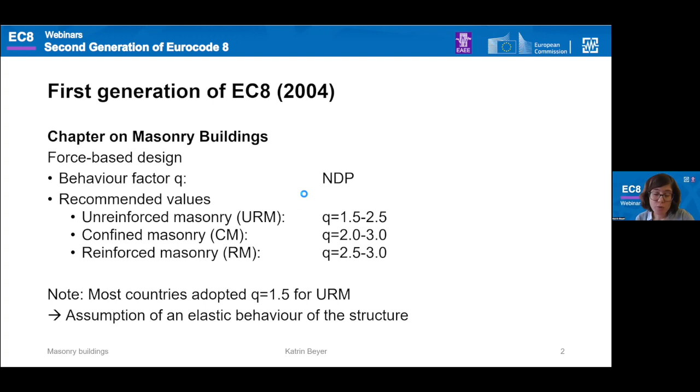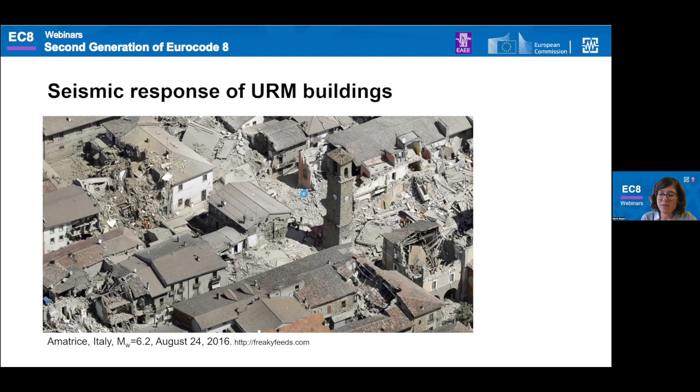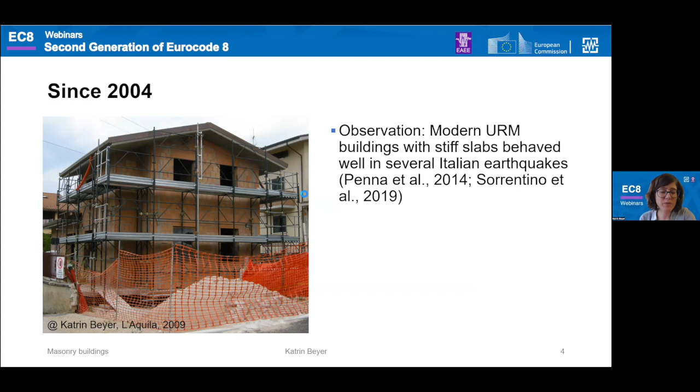And most probably that choice was fostered by the pictures that we see after every earthquake, where most of the damage is concentrated in unreinforced masonry buildings, like the one here from Amatrice. However, if we look a little closer at the damage, we see that these very heavily damaged buildings are often historical masonry buildings, and the modern masonry buildings behaved rather well in many of the past earthquakes, in particular in many of the past Italian earthquakes, with several reconnaissance reports in that regard. So what is the big difference between these modern masonry buildings and these historical masonry buildings?

One key feature is the absence of the box behavior that we have typically in historical buildings. You see here a historical building which had been retrofitted at the top with a reinforced concrete slab or roof and a ring beam. So there we have that box behavior, but at the first floor level we clearly don't have it, and you see the structure falling apart. I find this picture illustrates very well what box behavior is.

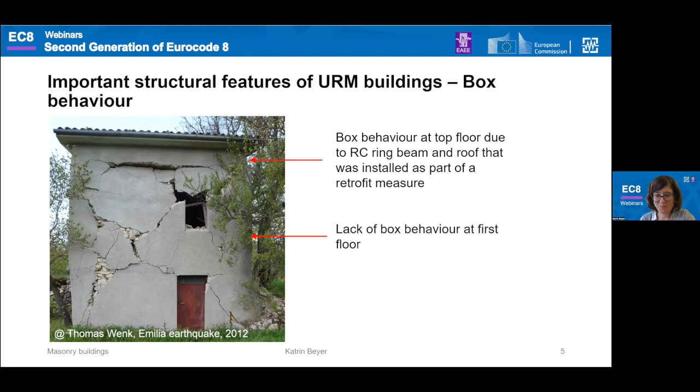The second important feature is the stiff floors and very good wall-slab connections that we typically find in modern unreinforced masonry buildings. If we don't have it, as in historical stone masonry structures often, this fosters out-of-plane failure of the walls, because the out-of-plane inertia forces cannot be redistributed to the in-plane loaded walls. Plus these diaphragms don't really provide good restraint to the out-of-plane behavior.

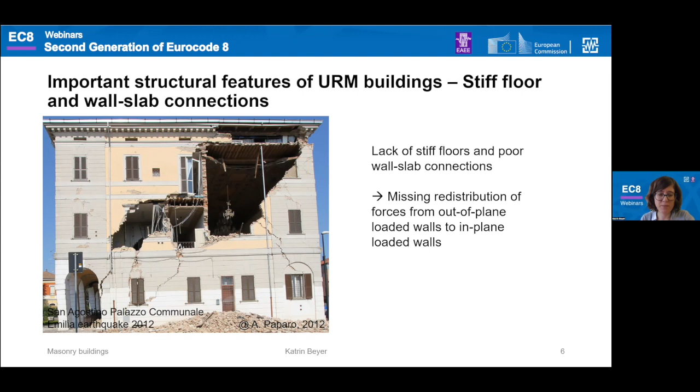So in modern unreinforced masonry buildings, we can typically achieve a box behavior, and the required characteristics are good wall-slab and wall-wall connections and floor diaphragms with a certain shear stiffness. That results in the behavior that we have.

First, we enable a redistribution of forces between in-plane loaded walls, increasing the redundancy of the system. We improve the out-of-plane stability of the walls by these good wall-slab connections, and we can transfer inertial forces from the out-of-plane loaded walls to the in-plane loaded walls. Finally, we can transfer the inertial forces to the foundation as in-plane forces in walls.

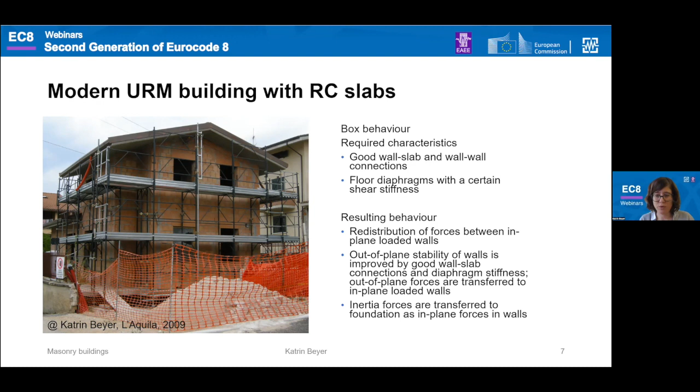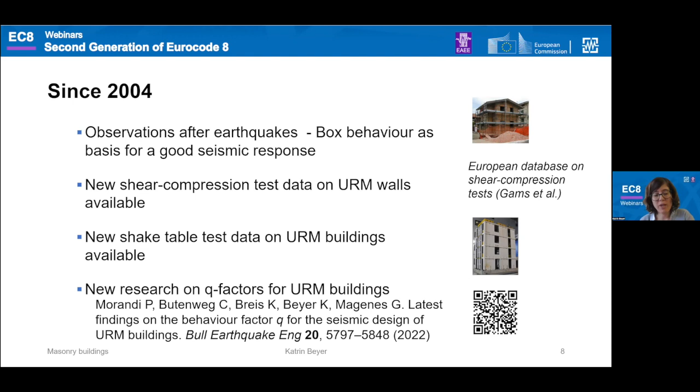So if we sum up the developments after 2004: we have observations documenting the good behavior of many modern unreinforced masonry buildings after earthquakes due to box behavior. In addition, we now have a whole new range of shear compression test data on unreinforced masonry walls - we set up a European database on shear compression tests for that purpose. We also have new shake table test data on unreinforced masonry buildings, and significant new research on Q factors for unreinforced masonry buildings, in particular by the research groups from the University of Pavia and RWTH Aachen.

So the goals of the revision for the masonry chapter were really the formal brief - as a particular brief for the masonry chapter was to reduce the number of NDPs. Additional goals, my personal motivation, were to clearly aim for robust structural behavior through box behavior, favoring redundancy, and also by limiting the axial load ratio. Why? Because high axial load ratios can favor brittle behavior or reduce the displacement capacity of our elements, and in particular reduce the margin of displacement capacity that we have after reaching the ultimate drift capacity and then axial load failure.

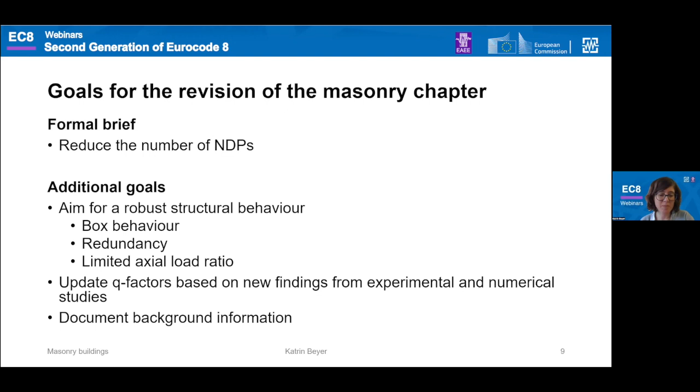One of the key things was, of course, to update the Q factors based on the new findings from experimental and numerical studies. And my personal goal was also to provide as much background information as I could.

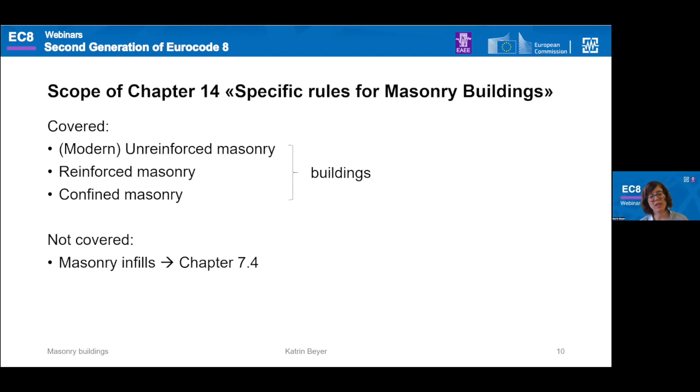This here is the structure of the chapter, but in this presentation I will really focus on these first few points, and in particular on the behavior factors.

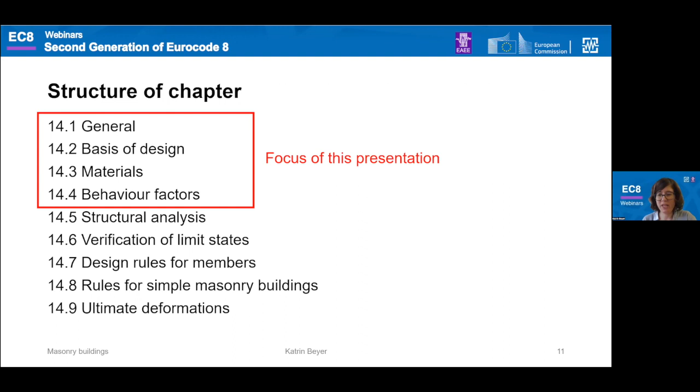Masonry buildings can be basically designed for two ductility classes, either DC1 or DC2. DC3 is not possible because classical capacity design concepts cannot be applied to unreinforced masonry structures. If the reference peak ground acceleration is smaller than 3 meters per second squared, you can use DC1 or DC2. If it's larger, then DC2 is required.

For DC1, flexible diaphragms are allowed, and that means we have no effective redistribution of forces from one wall plane to another, which means reduced redundancy. We also have no limit on the axial load ratio, and as I said before, that has potentially effects on the wall behavior in terms of brittleness.

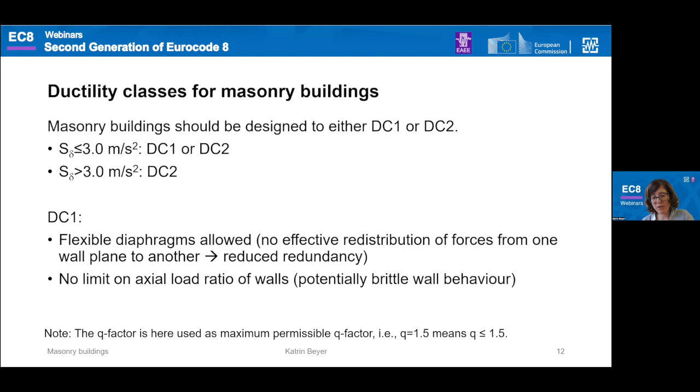For DC1, only the overstrength is considered, and the behavior factor for in-plane analysis remains at Q equal to 1.5. For DC2, we have no criterion for the global mechanism. We control the deformation capacity by limiting the maximum axial load ratio in the masonry walls.

We then have a behavior factor for the in-plane analysis, which is a function of the structural configuration, more specifically a function of the number of walls and the coupling effect. I will come back to that in a moment, as well as the masonry type and the axial load ratio.

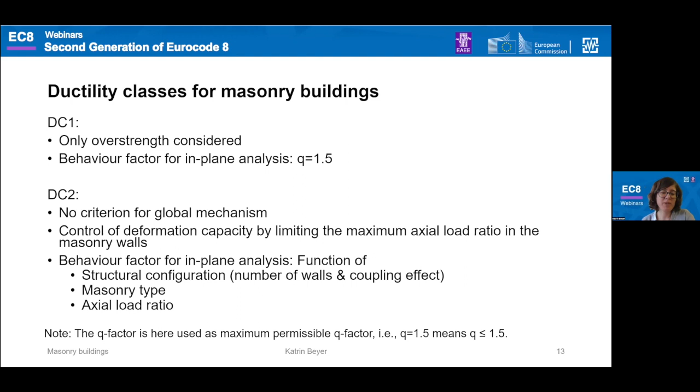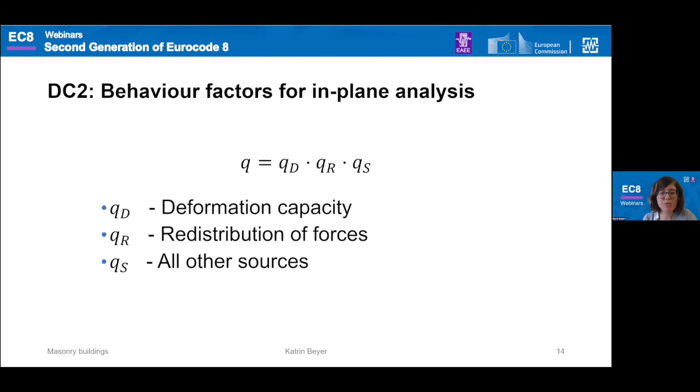As you have now seen several times in the new Eurocode, the behavior factor is written as a product of three factors, which are functions of the deformation capacity, the redistribution of forces, and all other sources. Now I will show you how this behavior factor is basically given for the in-plane analysis of unreinforced masonry buildings.

It's basically tabulated in this table here, and generally the table depends on the masonry type and the building configuration. But let's look at that a little bit more in detail.

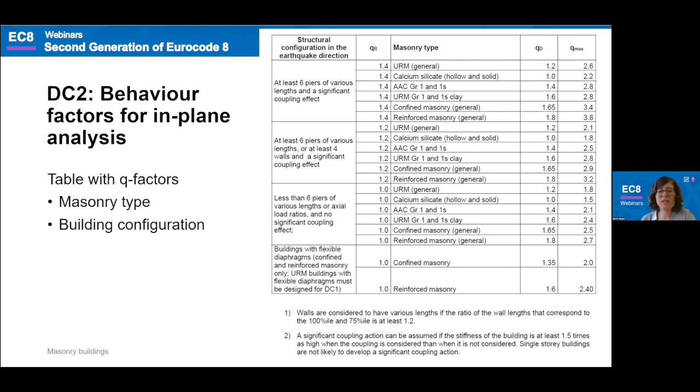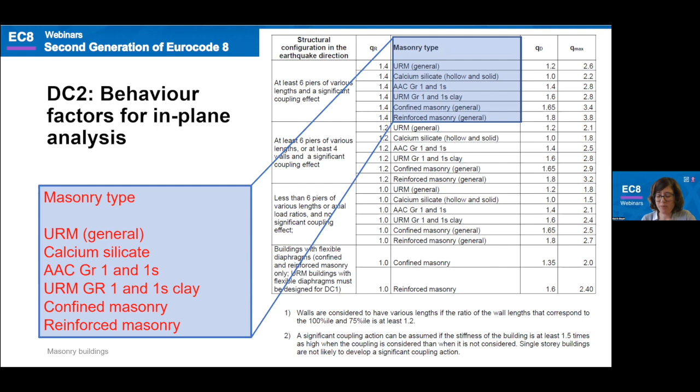So here we have the masonry types: unreinforced masonry in general, then also some specific brick types, confined masonry, and reinforced masonry types. And that is related to the deformation capacity of masonry elements, of masonry buildings.

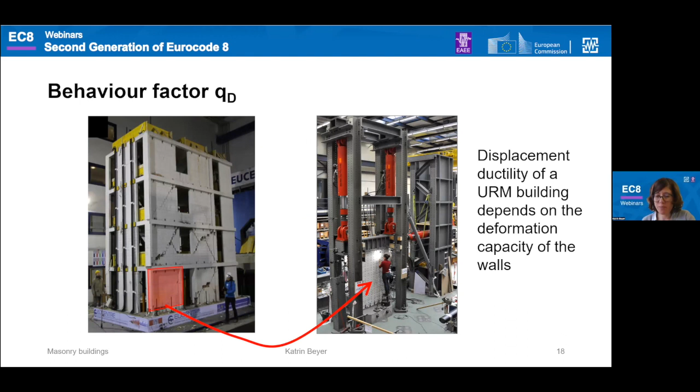From that we get the drift capacity, which is determined as the ultimate drift capacity at 20% drop in strength. It depends in particular on the axial force, which is typically kept constant in the test, and also on the shear span, which is also typically kept constant.

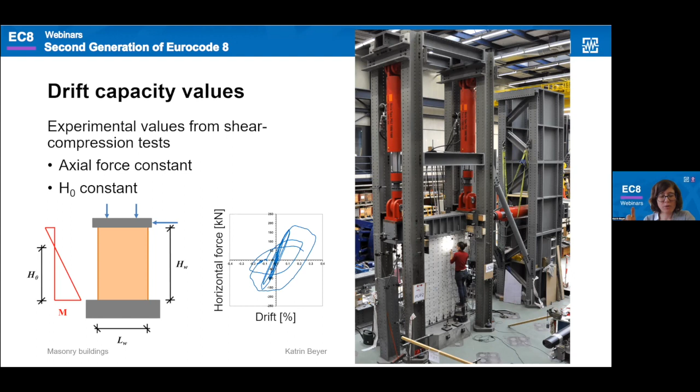From all these tests that were conducted, we set up a European database on the shear compression tests. These are quasi-static cyclic tests, and this is really a joint effort from the University of Pavia, in particular Andrea Penna, from ZAG in Slovenia, in particular Matija Gams, and EPFL, and so us.

For modern brick masonry, the database includes modern brick masonry and historical stone masonry walls, but here the main interest was the modern brick masonry part. I'll give you some examples of numbers of tests included in the database, and of course a lot of effort went into investigating the parameters that influence the ultimate drift capacity.

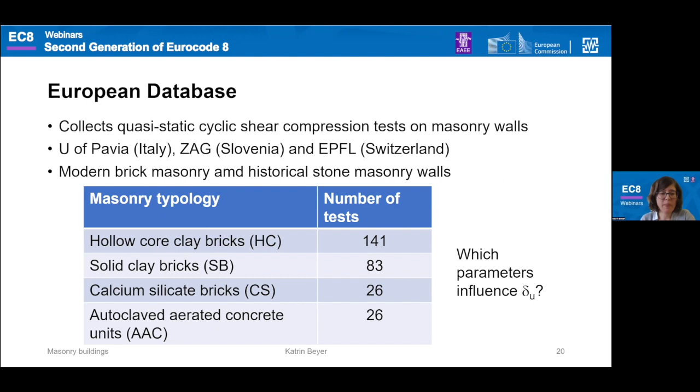So here I just give you a very short overview on what we found, based on much research that had been conducted in the past. That is, of course, the failure mode, the shear span, the axial load ratio, the brick type, and also the wall size.

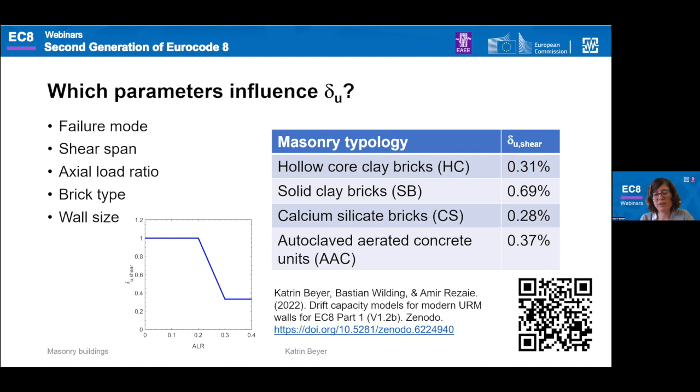If you're interested in much more background on that, I draw your attention to that background report that is linked here. Based on that, we basically tabulated the ultimate drift capacity for shear failure that you see here on the right. The ultimate drift capacity, however, is not necessarily exactly the same as the drift capacity at near collapse or significant damage.

And basically, to transform it, it now really depends a lot on engineering judgment. We wanted to account for a few factors, and I name here the three most important ones. The one is really also the difference between ultimate drift and collapse drift - so basically, what is that margin that we have after the ultimate drift? Another rather important one is also the load history effects.

We know that in most of these quasi-static cyclic tests that have been conducted in the past, many more cycles have been applied in the tests than real buildings would really see in real earthquakes. And then, of course, we also wanted to derive a partial safety factor to basically move from the median value to the 5 percentile value. All these arguments for this transformation, and then also the transformation into the Q factors, you find in that background document mentioned here at the bottom, that is co-authored by Guido Magenes.

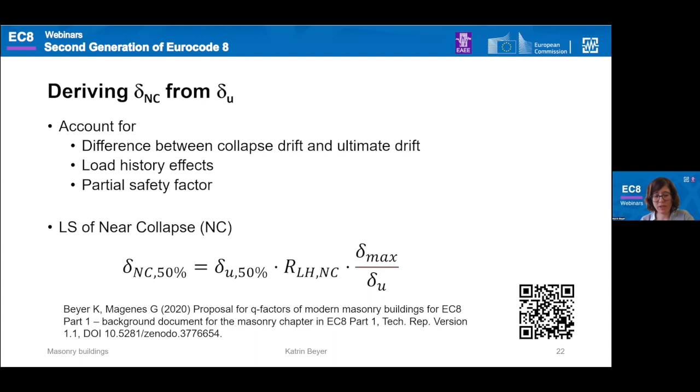Now, in order to basically transfer from the drift capacity values to the QD values, we had to again make some assumptions. The key assumption here really is that the displacement capacity of the building is controlled by walls failing in shear subjected to double bending.

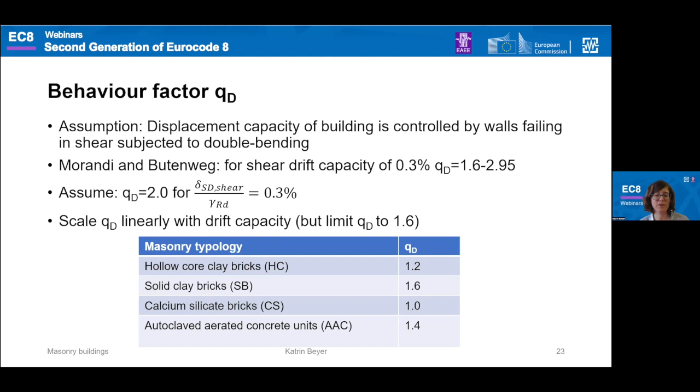For the two research groups in Pavia and RWTH Aachen, they had carried out studies basically on seeing what the QD value should be if the shear drift capacity is 0.3%. And so the median value is around 2. Then we basically scaled for the various drift capacities that we found for the masonry typologies, the Q factor linearly. So with that, we had basically our QD factors.

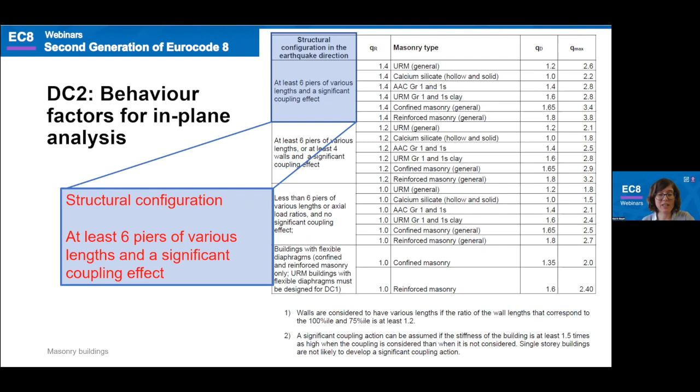For the QR factor - so now we come to the QR factor - at the table you basically find the criteria for the choice of the QR factor here. So in that first column, for example, it says if the structure configuration has at least 6 piers of various lengths and a significant coupling effect, then you have this QR factor of 1.4.

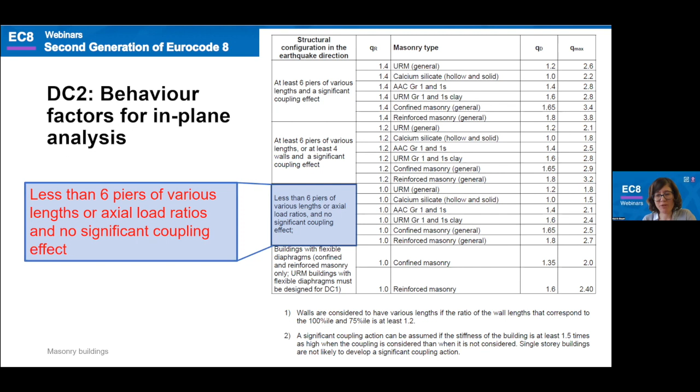Or if you have less than 6 walls, but you have walls of various lengths and axial load ratios, but no significant coupling effect, then you choose this QR factor here. So why are these terms - various lengths, axial load ratio, and significant coupling - coming from? Let's quickly look at that.

With significant coupling, we really mean the coupling that is provided either by spandrels, ring beams, or also, of course, by concrete slabs that really act like slabs and not just as diaphragms. There we can really clearly see that we get a significant increase in strength when compared to walls, if you basically just model a diaphragm action of these floors.

In order, however, to get such a significant coupling effect, it's really necessary to have more than one story. With one story, this coupling effect is very limited. And basically, to judge whether we have a significant coupling effect or not, you can model the coupling effect and not model it, and then the difference in stiffness - or the ratio in stiffness - should be at least 1.5.

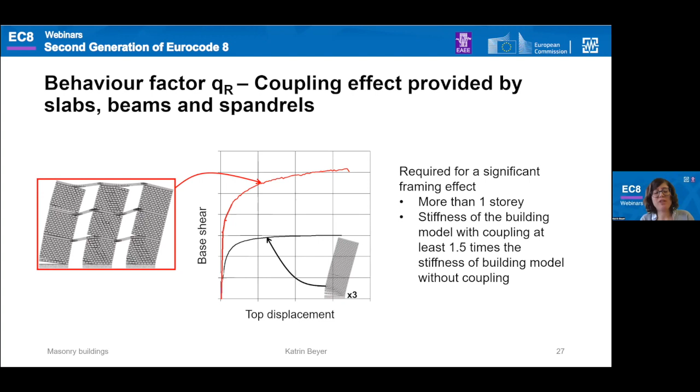Just a comment here - of course in the code, in the modeling provisions, we say you may model the coupling effect explicitly or not. In both cases, really, that QR factor is quite significant.

Once, if you don't model it, then you have really the difference between uncoupled walls and coupled walls. But also, if you model really the coupled walls, there's quite a big difference between the limit of elastic behavior and really the final capacity of that structure, just because we have really a redistribution of the axial forces as well. And then the limit of elastic behavior is really quite early on.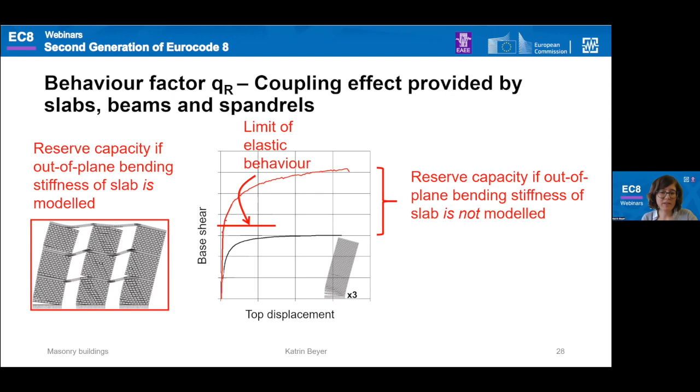So this is with regard to the coupling effect. And then, of course, also as in any other structure, the difference in wall length has an effect on the limit of the elastic behavior and that reserve capacity until really both walls are yielding. This is not any different to, for example, concrete walls.

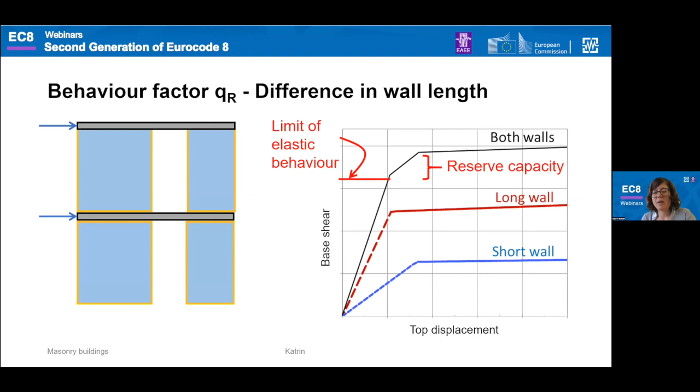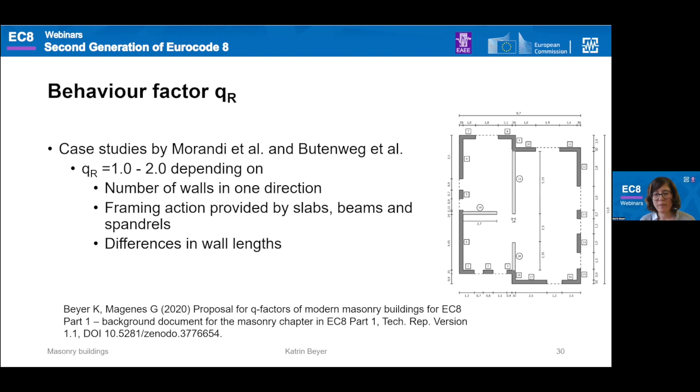Here are some summary results based on the data by Butenweg, and based on that we come up with these criteria. So basically you have 3 effects: framing action, the coupling effect, and the number of walls and wall lengths.

And so, I'm in a meeting. Sorry? Okay, bye. Could you please shut your microphone, Mr. Butenweg? Yes, sorry. Thank you. Okay.

Based on that, we have 3 criteria, and if all effects are fulfilled, you can assume QR equal to 1.6. If 2 effects are fulfilled, 1.3, and in all other cases, it's 1.

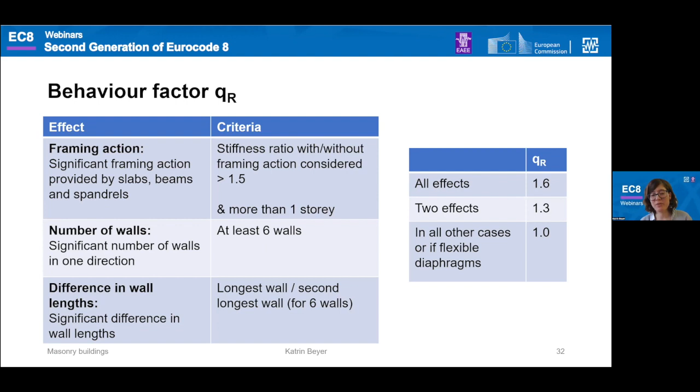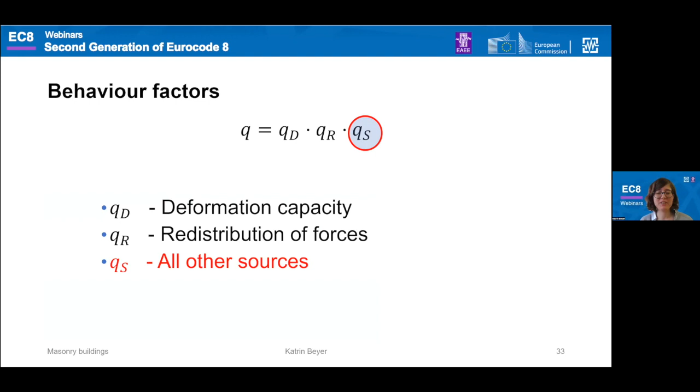Then we have the last factor, QS, and for all other materials there's basically no point talking about it because all other materials just assume 1.5. The main source is really the safety factors on the material properties.

However, unreinforced masonry is different because the resistance results to a large extent also from the axial force, and we cannot assume we have 50% reserve in the axial force. The material properties have a much smaller effect on the resistance in unreinforced masonry than in other materials.

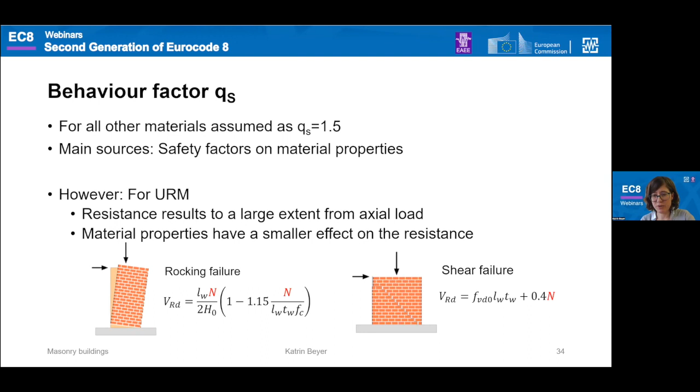Here are some equations for flexural failure and shear failure, where in both cases it's heavily dependent on the axial force. Based on that, you can argue that QS should be smaller for masonry than for other materials.

Of course, our design is really focused on walls failing in shear, and in shear failure we have that part of the cohesion in the resistance, so we have a partial safety factor on the cohesion. In addition, we might have some effects that are not modeled, like flange effects, but this can also advance with time. Based on that, we assume we might have a QS factor of 1.35.

I think this is really more a generous estimate, but it's smaller than 1.5, and it might be in that order. So in order to be in line with other materials, we increase QS from 1.35 to 1.5, but in return we reduce the QR factor from the factors I just presented: 1, 1.3, 1.6 becomes 1, 1.2, 1.4.

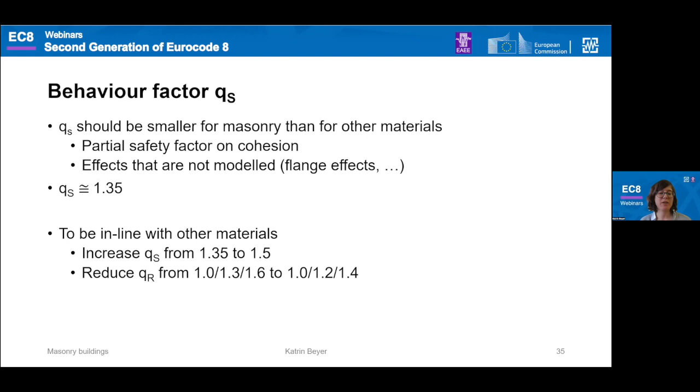And this is really the background for the table I showed you in the beginning. The final Q factor is the multiplication of these 3 factors, but the maximum Q factor was kept at 2.8, to be consistent with reinforced concrete structures. Reinforced concrete wall structures, depending on the degree of coupling, had Q factors between 2 and 2.5 for DC2.

So the Q factors we have here, as a first impression, might seem high, but one should also keep in mind that unreinforced masonry structures typically have a higher redundancy than reinforced concrete wall structures, and the coupling plays a larger role. So they have a stronger coupling effect typically than reinforced concrete wall structures. That is really taken as justification for these higher Q factors for some of the masonry typologies only.

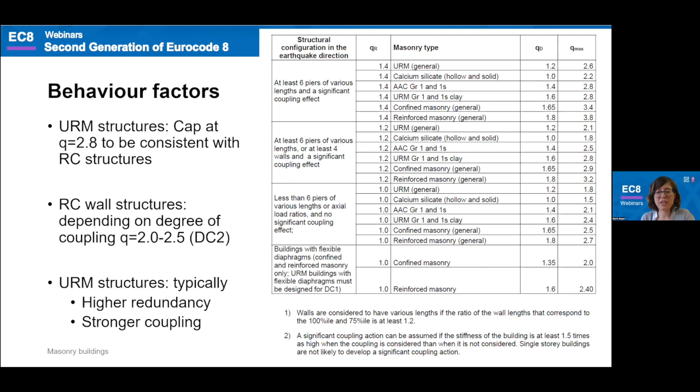So this was about the Q factors for the in-plane behavior. Now let's also briefly look at the behavior factors for the out-of-plane response.

So we look here. For DC1, for all masonry typologies, we have a Q factor for the out-of-plane response of 1.0. For DC2, it depends on the masonry typology: for unreinforced masonry, Q equals 1.25, for confined masonry as well, and for reinforced masonry 1.5.

However, it is not necessary that explicit checks for the out-of-plane response are done if the slenderness limits given in the code are met. And again, there's a background document on these out-of-plane limits available.

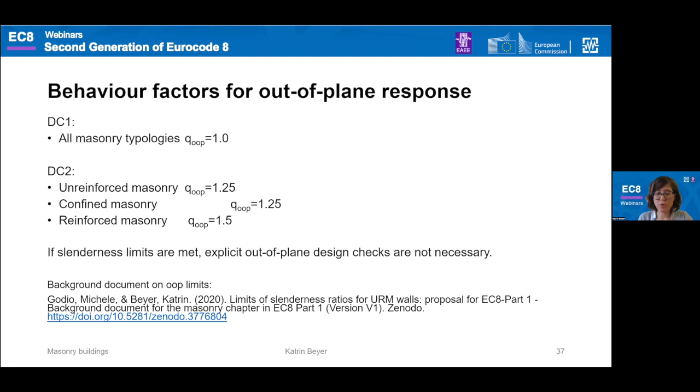To close with my presentation, I want to draw your attention to the background documents that are all openly available on Zenodo, that data repository from CERN. Whenever it was appropriate, we basically don't just share the code and the text, but also the data and the code that underlies the analysis.

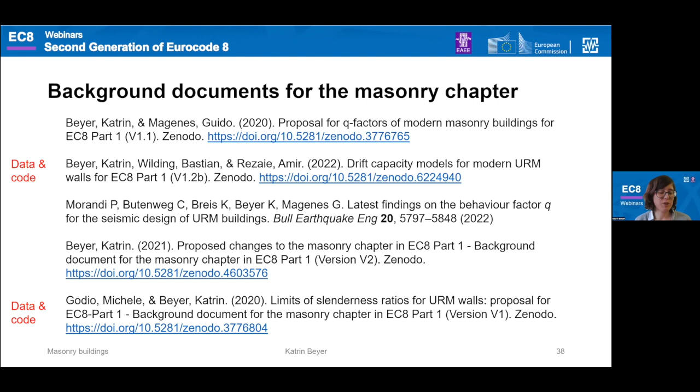For example, for the drift capacity models, you find in there all the shear compression test data, and also all the code for analyzing this data.

Before I close, I really want to acknowledge, in particular, my collaborators who helped me developing the work, but also the colleagues from the University of Pavia: Professor Guido Magenes, Dr. Paolo Morandi, and Professor Andrea Penna. A lot of the revisions are based on their work, as well as on the colleagues from RWTH Aachen, in particular Professor Christoph Butenweg.

I would also like to mention Dr. Matija Gams from ZAG, who was really one of the driving forces behind the open database for the shear compression test. I would also like to acknowledge the fruitful discussions that we had in Working Group 1, Masonry, Project Team 2, in particular Professor André Plumier, Professor Philippe Bisch, and Professor Dina D'Ayala, for editing the final version of the code.

With that, I'm at the end of my presentation. I thank you for your attention.

Thank you very much, Professor Beyer.

We have a question from Francesco Messali from TU Delft. He mentioned that probably in slide 34, the friction coefficient is maintained equal to 0.4, and in several experimental campaigns higher values were found. So his question is, why was the opportunity to revise such a value not considered?

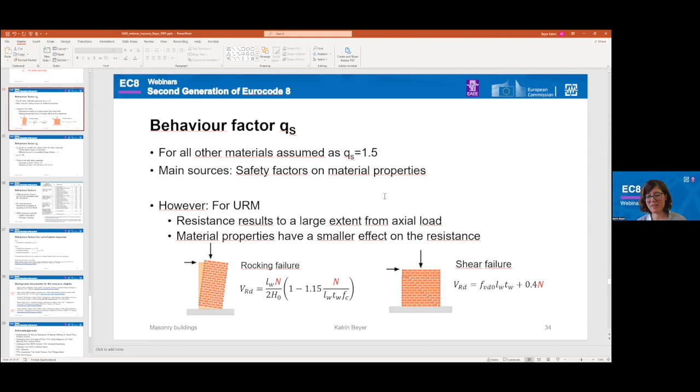Well, the resistance models are really taken from Eurocode 6. So we didn't want to revise something that is really the domain of Eurocode 6.

We really try to be as consistent, or completely consistent, basically. Okay, thank you. I have a question about the European database. You mentioned that it mainly concerns static failure, so what are the data allowing us to account for the cyclic failure or the load history, as you mentioned also in your presentation?

Okay, so there's a quasi-static test, they're all quasi-static cyclic tests that were considered. So the cyclic effect is considered, and the load history effect in the sense of the number of effective cycles applied, not in terms of the order of cycles that were applied.

So there we can basically compare when we do rainflow counting on real buildings what they would be subjected to, and compare the number of cycles to the cycles applied in quasi-static cyclic tests. We see that the number of cycles applied in quasi-static tests is often really very much higher, often a factor of 3 or something like that higher.

And that, of course, is very clear. It comes from the fact that we would like to really determine the failure drift as accurately as possible in the test, and therefore we apply relatively small displacement increments. But compared to the demand that we have really in low to moderate seismic countries, this then often results in a number of cycles much higher than what we see.